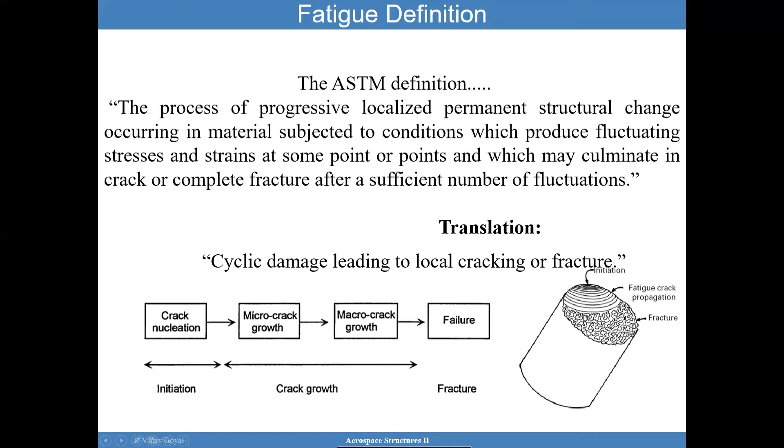So the evolution of fatigue requirements has evolved. Historically, before the 1950s, the design requirements were driven by basic engineering properties. And the material properties were really driven by strength and creep.

From the 60s to 70s, there's more emphasis for designing against fatigue and considering the high cycle fatigue and low cycle fatigue. I'll be covering some of that history, which really predates this time. It goes even back to the late 1800s.

drivers. For example, for fatigue, what I'm looking for is that initiation. Once the crack initiates, perhaps I can then switch into damage tolerance. But when I look at damage tolerance, I am assuming that there's some inherent defect that needs to be considered in the design.

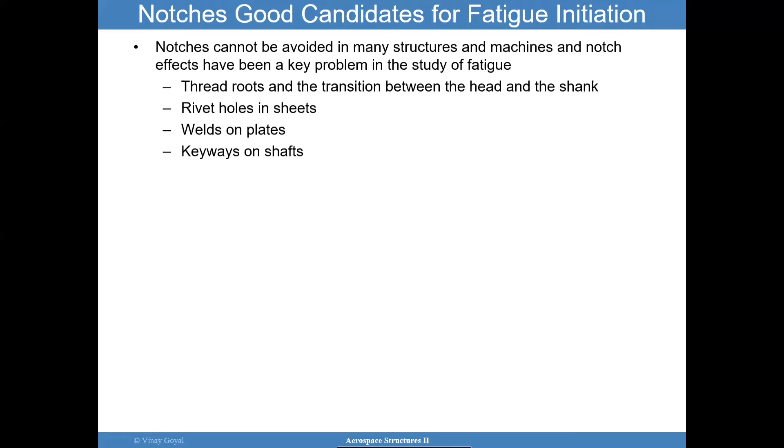The idea is really to decrease the stress concentration as much as you can, especially if the structure is subjected to fatigue environments. Thread roots and transition between the head and the shank can be a problem. Rivet holes in sheets, welds on plates, keyways on shafts. Those are just a few examples.

So what are the factors that influence fatigue damage? You have the stress range, and I discussed that before. If you have a small amount of stress range, such as bending an aluminum clip back and forth slightly, you're unlikely to fatigue that part. But if you bend that aluminum wire very dramatically back and forth, then you're more likely to influence the fatigue damage and expedite the process.

Stress range is really the basic cause of plastic deformation, and consequently, it is the one that can cause the accumulation of damage. Another point I want to make is the mean stress. If you have a mean stress that exists in a part, you're also likely to influence fatigue damage.

Stress gradients - for example, I'll show you later that bending is a more favorable loading mode than axial loading, because when you have bending on a part, fatigue cracks will propagate into a lower region of lower stresses. And it is proven, and I'll show you some data, that bending is actually more benign than if I were to axially load the sample cyclically.

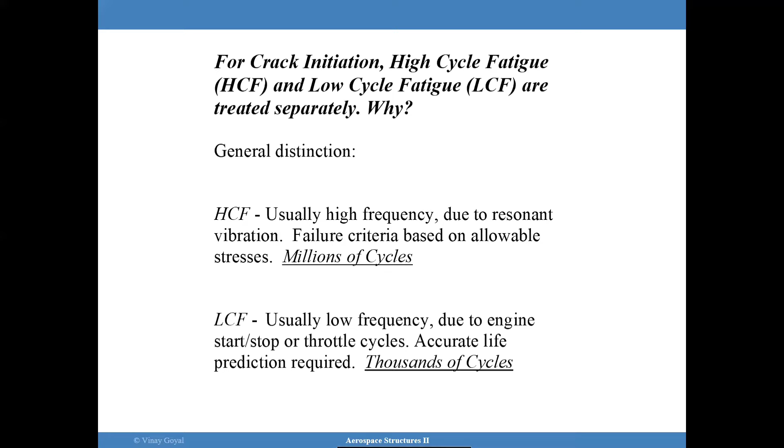This has happened multiple times now. I think it's important to understand that the way this particular airline operates is that they have quick turnarounds, and very short flights, and they predicate themselves on flying each aircraft more than 3 or 4 times a day. Some of them can reach 6, 7 times, and that is not common in the airline industry. Their model is such that you are taking off quite a bit and landing.

And so you may not be able to use hours in service as a good metric for inspections because of that. As a consequence, this particular situation had to be revisited, because clearly fatigue from a hole was a particular concern, and it was driven really by the ground to takeoff and ground to air cycles, back to ground. That's one cycle - that's one complete cycle.

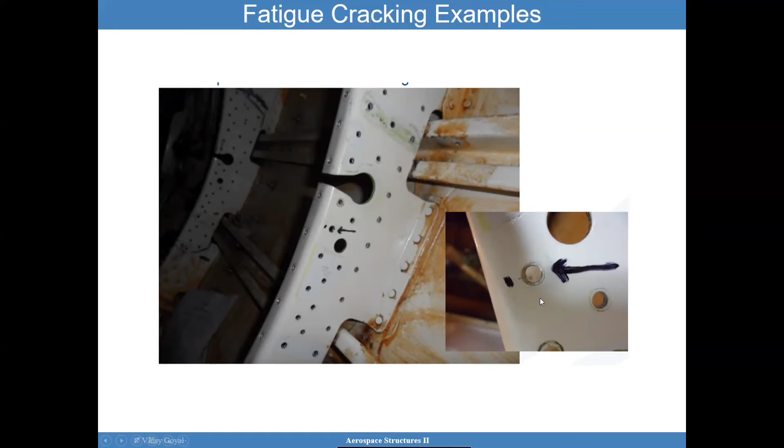Fatigue cracking in other aircraft applications is hard to see here, but there's a crack near a hole. We've also seen fatigue issues with turbo machinery in engines, for example.

You have severe structural issues and challenges that you're going to see, especially with engine applications: high structural loads, fatigue, creep. You definitely need something that's environmentally friendly, fatigue cracking resistant, able to resist initiation and propagation, creep resistant, strong, lightweight, predictable, affordable, and environmentally stable. Nickel superalloys tend to do a good job of those.

Combustion turbine components present a severe thermal fatigue cracking challenge. You have mechanical fatigue caused by cyclic thermal strains, high temperatures accelerating fatigue damage, and then oxidation at the crack tip that can make things worse.

Here's an example from the literature of fatigue, a major challenge in turbo machinery. Here you have a rotor that has exhibited fatigue crack initiation, clearly caused by load cycling. Cyclic loading occurs at cyclic loads well below the ultimate strength. That's the issue - you may think you have sufficient strength margin against the ultimate capability, but it's really the load cycling that's causing this damage.

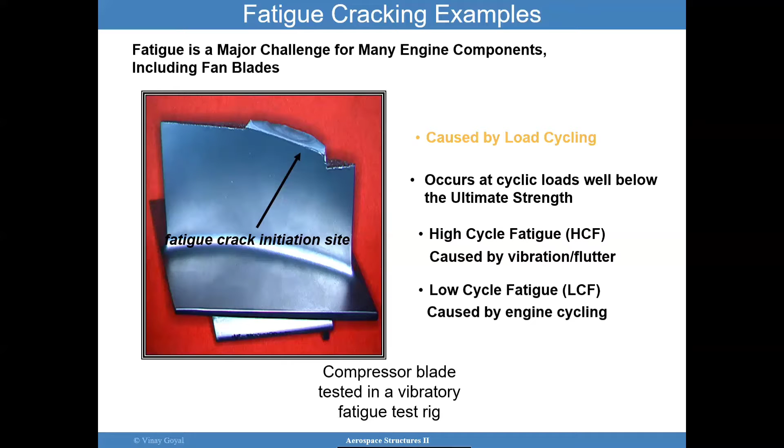We have the famous Aloha Airlines Flight 243. The failure had occurred due to cyclic loading. The mid-flight fuselage failure was caused by corrosion-assisted fatigue in that example. All machine and structural designs are problems in fatigue because we have the forces of nature in play.

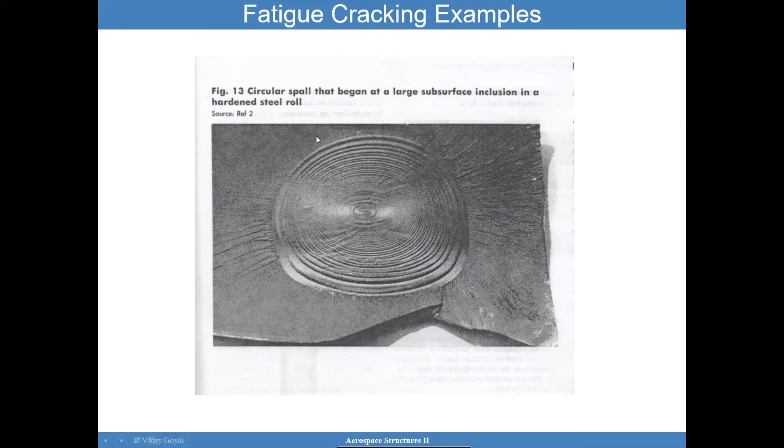Here's an example of a circular spall that began at a large subsurface inclusion in a hardened steel roll. Hopefully you'll soon be an expert at telling me where you think fatigue initiated.

The lesson learned here is that while you may implement fillet radii in your application to reduce the potential for fatigue crack growth or initiation, it's important to understand that you may intend something for the drawing, but manufacturing produces something else. So it's important to inspect and ensure that your part, which may be fatigue critical, be compared against the drawing to ensure you haven't violated any requirements. Otherwise, you may have unintended consequences, and you may have thought your design was adequate, but it was not.

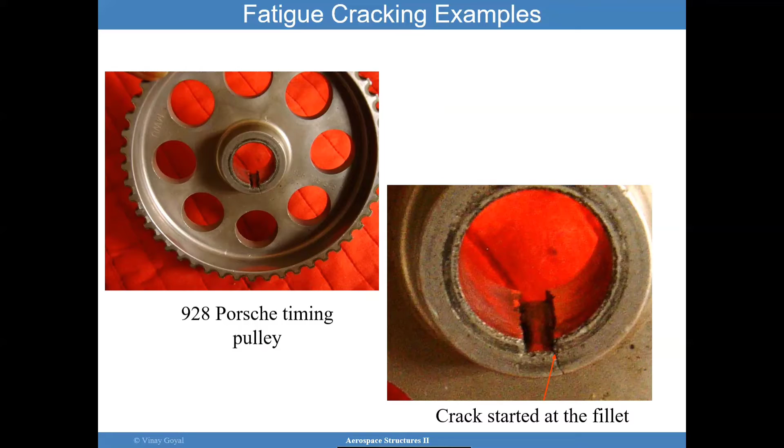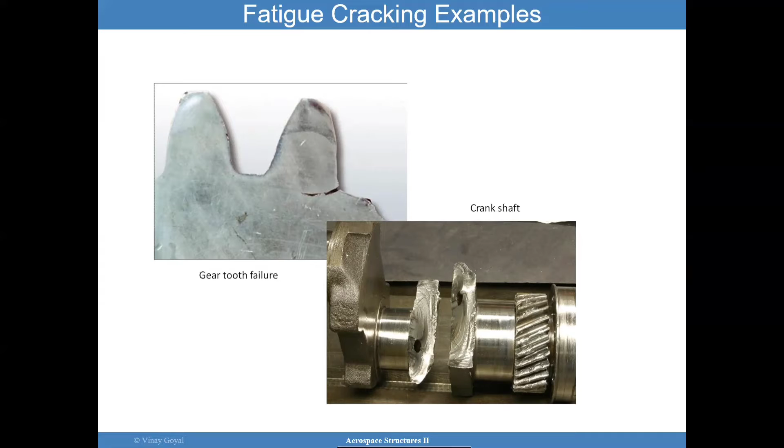However, once initiation occurred, it was quite rapid and it accelerated, and you will see these beach marks that we'll be talking about later on, followed by ductile failure or sudden failure in the remaining net section. Fatigue crack growth examples can occur in tooth failures and crankshafts, and they're all going to have very similar types of beach marks, which I'll be discussing soon.

Here, why don't you take a moment and see where you think the crack initiated. And I know that I talked about beach marks.

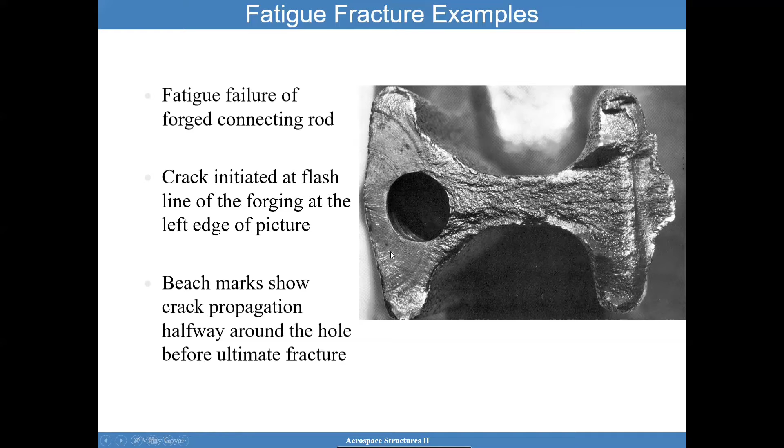You also have fatigue failure of a forged connecting rod. The crack initiated at a flash line of the forging at the left edge of the picture, and you can see some of the marks here. The beach marks show crack propagation halfway around the hole before ultimate fracture, and this is your ultimate fracture right here.

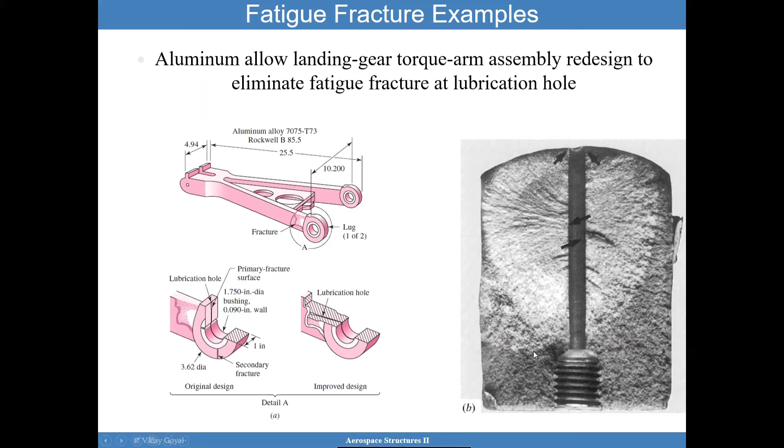Here you have an aluminum alloy landing gear torque arm assembly, which required a redesign to eliminate fatigue fracture at the lubrication hole. Again, fatigue fracture can occur in these types of stress concentrations. In this case, feel free to pause the video and see if you can spot signs of crack initiation, growth, and what could have caused the growth to failure.

Fatigue fracture examples are not new—they're not from the 1900s. On May 8th, 1842, we had the Versailles train crash. The axle of a locomotive train suddenly failed while departing a birthday celebration for a king, causing a derailment which resulted in a crash and fire, and more than 75 people died. During subsequent debates regarding this accident, the term fatigue was coined to describe the sudden fracture of a component from repeated stresses which appeared to be performing well up to that point.

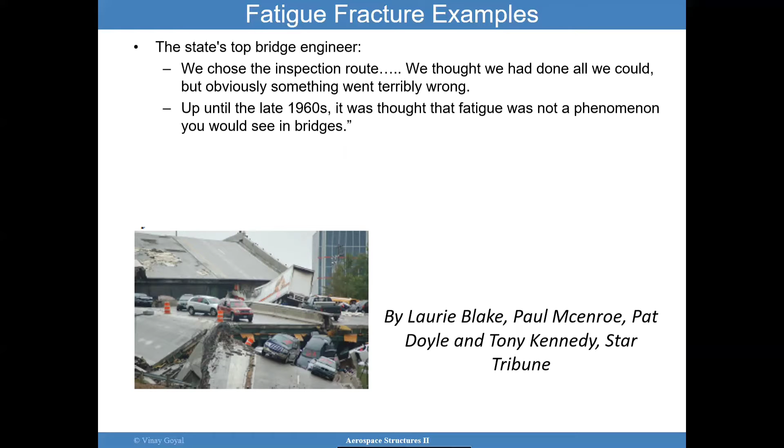So enough about examples—let's look at some stages of fatigue failure. Stage one is the initiation of a microcrack due to cyclic plastic deformation. It doesn't always have to be cyclic plastic deformation.

Here is an example of the features of a fatigue fracture surface. Here you have the origin, and then you're going to have different areas of texture as you move along—you can see these marks. Then suddenly you're going to have some sort of shear lip that could occur, and that's indicative that now you have turned into a sudden failure of some sort.

So region A, which is right here, all in white, we're going to call that the fatigue crack growth area. Over here, the shaded area is the final static failure, or the ductile failure, or the brittle failure that occurred suddenly.

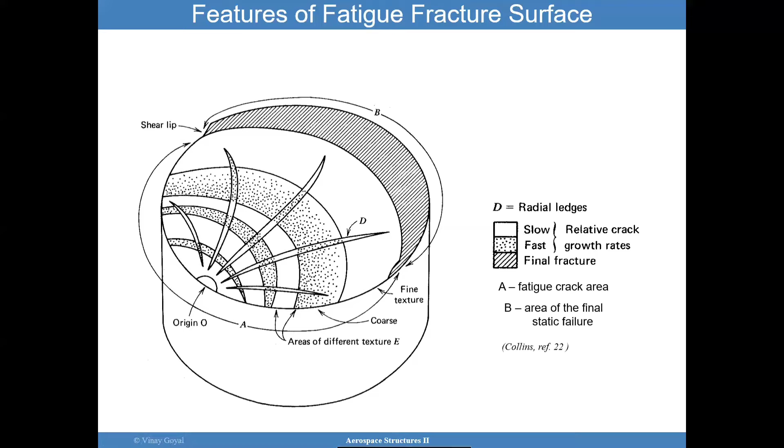So what are the fatigue stages for crack growth? If this is the loading direction, we will have stage 1 crack propagation, and the fatigue crack initiation will occur via persistent slip bands. The small crack propagation will be via a mode 2 mechanism, meaning that the surfaces are sliding relative to each other, regardless of the fact that we're loading in the mode 1 direction.

So even if the loading is perpendicular to the sample, the crack will start as mode 2 and then start moving into a longer crack propagation via mode 1 mechanism. Mode 1 here means it opens the crack. Mode 2 means it's sliding, the surfaces are sliding past each other.

Here you have a little more detail about the initiation process. That's your original surface. You have some amount of intrusion, some amount of extrusion, and then you have the persistent slip bands. We have this stage 1 fatigue crack growth, and you have all these gliding dislocations. But as this occurs and propagates further, then it will become mode 1. So it starts sliding and then turns into mode 1.

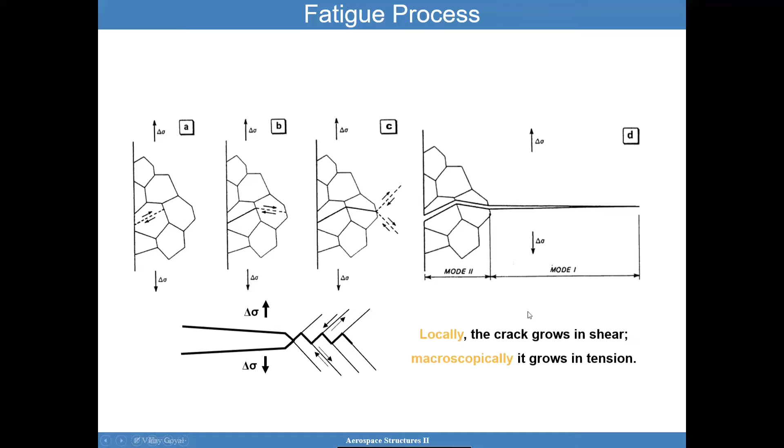So the fatigue process from the material science perspective is cyclic slip, fatigue crack initiation, stage 1 fatigue crack growth, stage 2 fatigue crack growth, brittle fracture, or ductile rupture. So it's really important to understand that these processes occur microscopically and then turn into macroscopic crack growth, and all of that has to do with the persistent slip bands we talked about. You're going to have some surface roughening because of that. Sometimes you get some sort of peeling indication of the surface.

So the fracture surface characteristics are important to understand, especially in the failure investigation.

You have the ductile mode of fracture. The typical surface characteristics will include cup cone, dimples, a dull surface, inclusion at the bottom of the dimple. You could have a mode of fracture that's brittle intergranular, which is between the grains, so that's shiny - the grain boundary is cracking. You may have a brittle transgranular fracture, which is also shiny. You're going to have some cleavage fractures, and it's relatively flat.

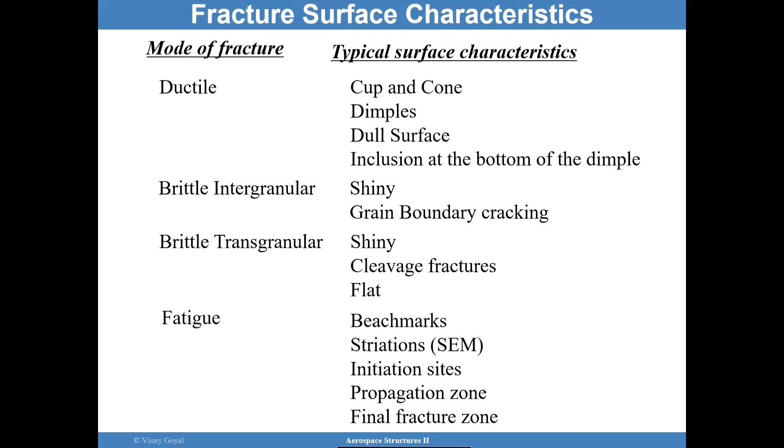And then fatigue is going to typically have beach marks, striations, initiation sites. You're going to have a propagation zone and a final fracture zone. So let's focus on this a little bit. I think it's worth looking at, especially if you're working on a failure investigation. This can be very valuable to you.

Say you have different fatigue surfaces, and I ask you, hey, where does the crack initiate? Where does it propagate? And what does the final rupture look like? So let's focus first on the high nominal stress conditions, which you could have a no stress concentration type, you could have a mild stress concentration, and a severe stress concentration.

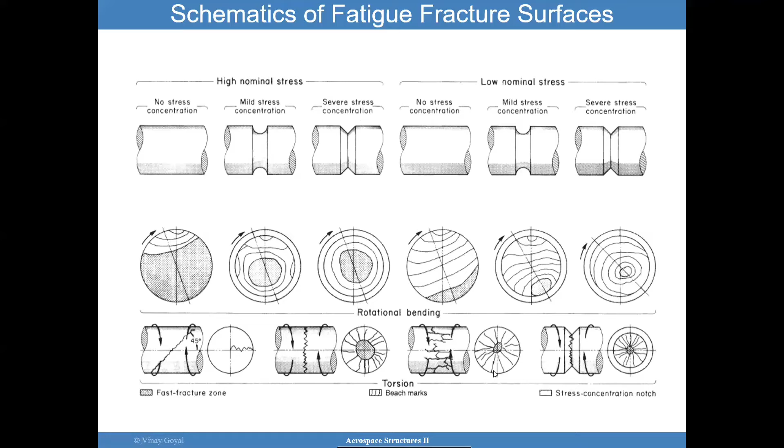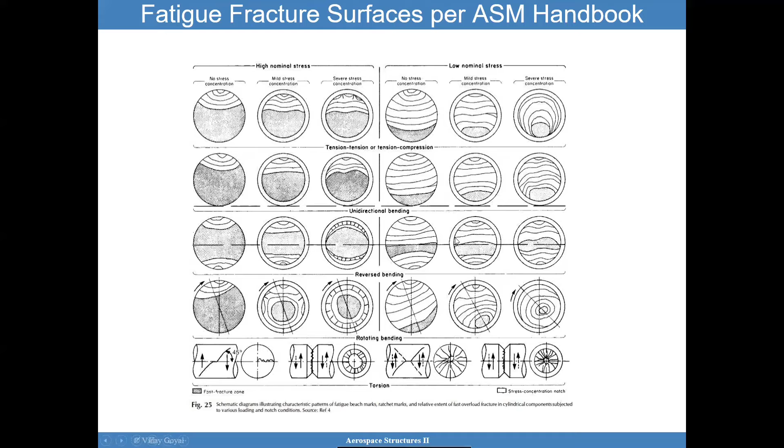Here's other pictures that are pulled from SAE. I invite you to pause the video and see if you can determine what is going on with these pictures. And for the ASM handbook, again, more pictures for you to consider and study on your own. I covered all this, and here the ASM handbook provides additional pictures for you to study, Figure 23.

Fatigue life methods: the methods are required for predicting the number of cycles to failure for a specific level of loading. There's two methods: stress life method, least accurate, particularly for low cycle fatigue application, is the most traditionally used. Strain life method requires a detailed analysis of plastic deformation on localized regions. You're going to have several idealizations leading to some uncertainties, and low cycle fatigue can be very difficult to predict.

I'm going to show you why it's uncertain and why this is such a difficult problem to really predict accurately. You will be confronted with the situation of having to do it, and my goal is to teach you some of the things you need to consider as you try to use tools for analysis predictions. For like any analysis, whether it's strength, fracture, heat transfer, you need to have some constitutive behavior that allows you to predict what you're looking for.

When you look at fatigue, you really are relying on a lot of test data that allows you to find curves, or define curves, that you can then use to predict fracture or fatigue. The fatigue methodology typically starts with understanding the loading history provided, the component geometry, material properties. Once you've defined the stress strain curves for the materials, then you can go into damage analysis using the service life of the component, the component geometry, the material properties. With that information and the fatigue data together, you can determine fatigue life.

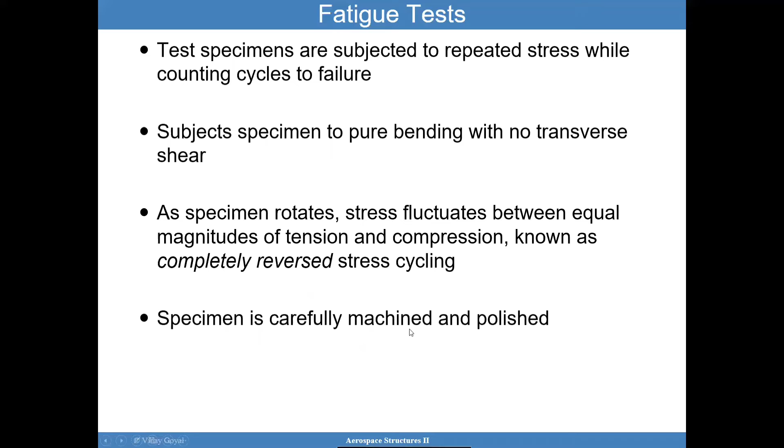So what are the effects of diameter on the specimen? If I have a large cross-section compared to a smaller one, and it was a hollow tube, then you have a lot of area under a lot of stress compared to this situation. It was found that even though I may have this same amount of stress, for a larger sample it can reduce the endurance limit, because there's more likelihood of microstructural defects being present when you have a larger area.

So there were some size effects found. If I had a 0.3-inch diameter sample, it took longer to fail, even though it had a thinner section, but the same stress. When I went to a larger diameter, the endurance limit dropped. What I mean by endurance limit is when I got that infinite life situation.

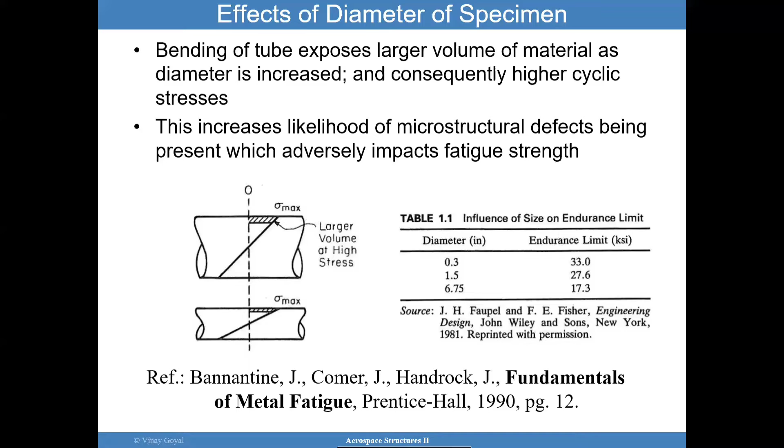So what are the types of repetitive loading you may see? In general, you may see moderate, mild, or severe periods. In a ship, you'll see weather conditions like a storm. In a commercial aircraft, you're looking at turbulence. But you're going to have a fatigue spectra as a point. In a launch vehicle, you'll see a different fatigue spectra. The idea is, how do I count the cycles? How do I count these amplitudes that could be causing a problem for me?

I want to define some terminology that's going to be useful. You're going to have the amplitude of that stress, which we call sigma max minus sigma min divided by 2. We call the range sigma max minus sigma min. And then the mean stress is sigma max plus sigma min divided by 2. One cycle is considered when I return back to that mean value.

Then I have R, the R ratio, which is the minimum peak divided by the maximum peak. That's another important thing to consider. When do I get one reversal? When I go from positive to negative, or from one end to another, we call that a reversal. But for me to have a full cycle, I need to go from one value and back, which represents a full cycle. This will be a half cycle.

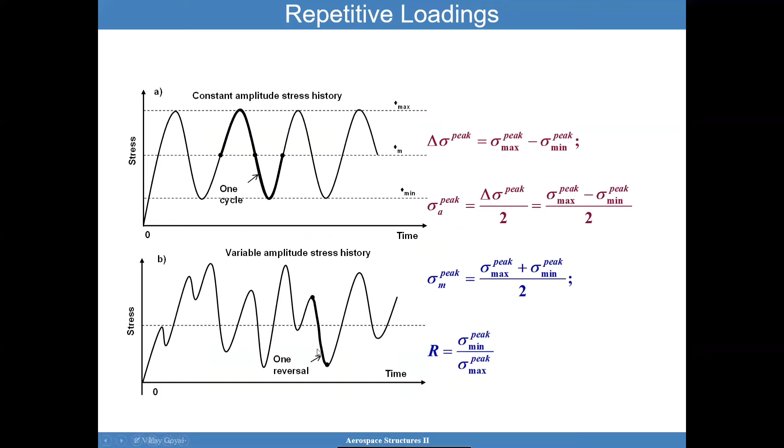This one has a reversal, but in this case it's not fully reversed, as I had discussed in this slide. So some terminology to consider.

Again, the fluctuating stress can be characterized by simply specifying the maximum and minimum stress, and then the mid-range or mean stress is important, and the alternating stress component sigma A is measured from the mean to the max. Very important to understand this terminology as we'll be using it.

The stress ratio tends to be very important because that tells me if I have a reversible type situation. If R equals -1, then sigma min is the negative of sigma max, which means I have an R of -1, and so I have a fully reversible cycle.

Let's look at this again here. Sigma max is 300, sigma min is -300. 300 divided by -300 is -1. And as you can see, R of -1 becomes a stress ratio that gives me a fully reversed situation.

There's another terminology that people use, called the amplitude ratio, which is the amplitude divided by the mean. That's useful to know because it gives you a relative understanding of how much I'm really fatiguing in terms of stress relative to the mean stress.

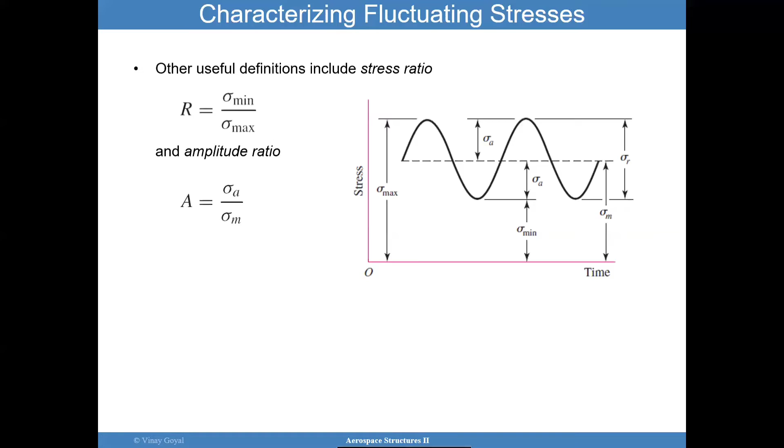If the mean stress is very high, that gives you some information about how much I'm ranging from max to min, how big that range is. This is very important to really understand what's going on. I know I have a lot of information here. I want to cover a little bit about what R ratios mean in terms of the loading situation.

When R is -1, you have equal value of max and min stress in terms of magnitude, and my mean stress is right at 0. So that's fully reversible loading.

Then I have this situation of R equals 0, which means that if I put R equals 0, that means sigma min is 0. So that means I have a maximum stress, but the minimum stress is 0, and so the mean stress is greater than 0 in this case.

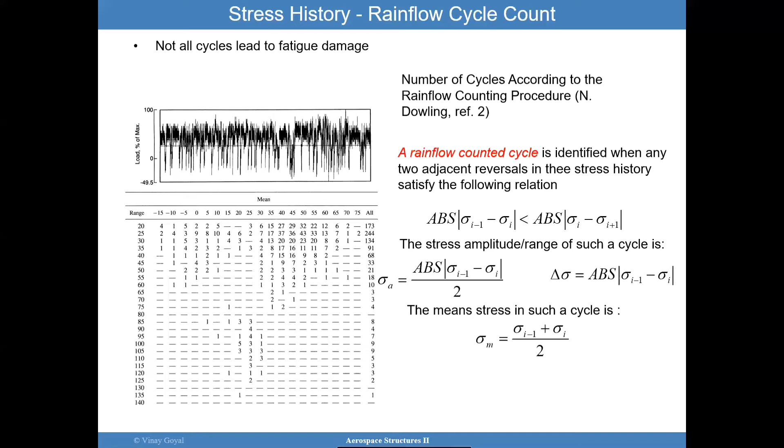So again, you have to look at two adjacent reversals in the stress history and then determine whether you should count the cycle. I encourage you to look at the link below to study how to do a Rainflow cycle count. I won't do it in this particular lecture, but I'll cover a little bit on how this works so that it's understood.

But I don't want to start counting from the small ones—I want to start counting from the big ones to the small ones, and that's really the way you want to go about it. The Rainflow counted cycle is identified when any two adjacent reversals in the stress history satisfy this relationship. That's really when you count the cycle for that.

So again, I'll put a link below where you can study other examples. It's going to be a nice video on that. And it's not by me.

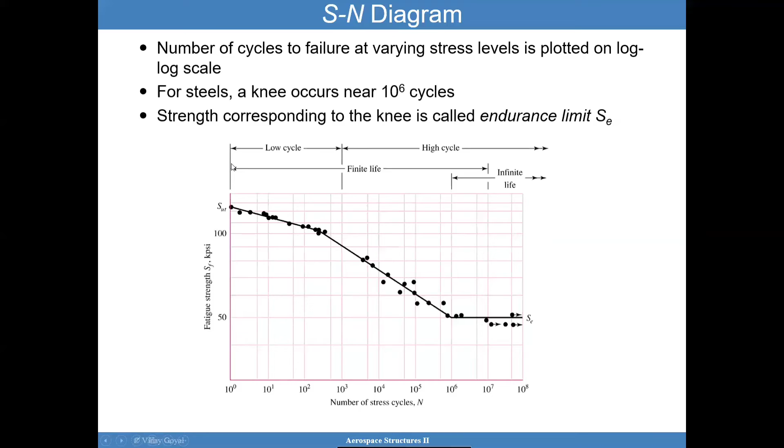The endurance limit is usually presented in a log-log plot, with the actual SN line usually representing the mean of the data. Certain materials, primarily BCC steels, have an endurance or fatigue limit, SE, which is a stress below which we believe the material will have infinite life. For engineering purposes, we could consider infinite life to be 1 million cycles, but I'll warn you against that, because some applications such as turbo machinery could reach 1 million cycles fairly easily.

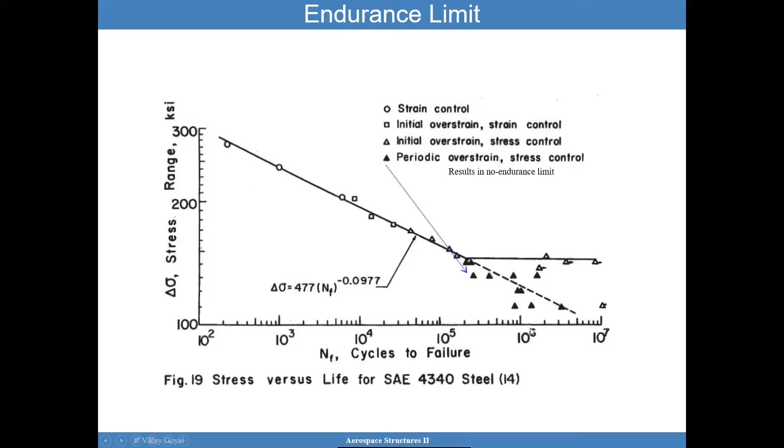If you look at a situation where there's periodic overstrain, look at how the endurance limit is gone, where I start having this finite life. If I have an initial overstrain and do strain control, for the most part you have an endurance limit, but at 10 to the 7th cycles, you start losing it. So if you have periodic strain issues, there could be a situation where this endurance limit no longer applies.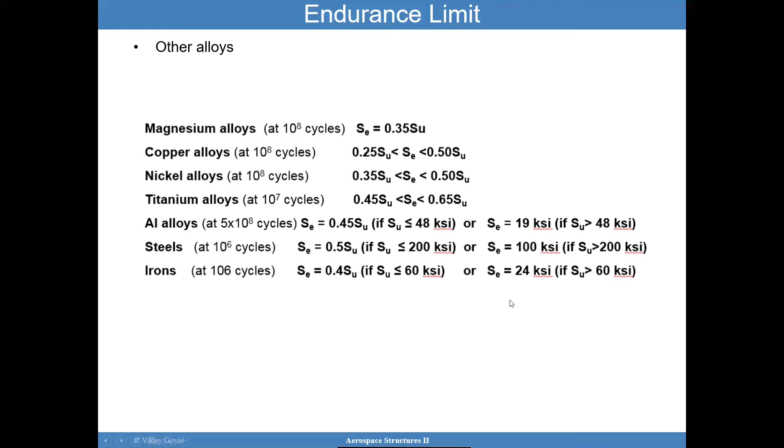For aluminum and copper alloys, there's typically no endurance limit, and a lot of people think there is, but there's not. Eventually these materials will fail due to repeated loading. To come up with an equivalent endurance limit, designers typically use the value of fatigue strength at 10 to the 8 cycles to go for a robust design.

So we already covered this.

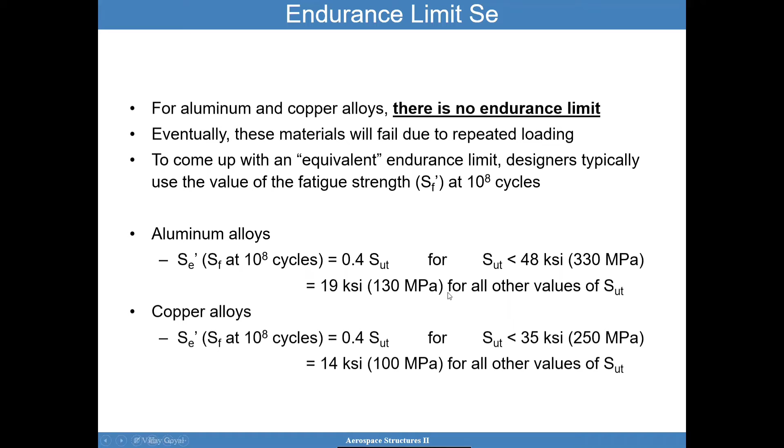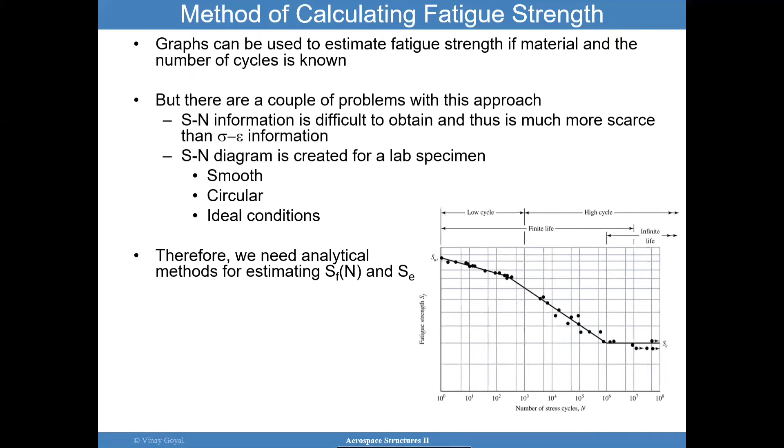Graphs can typically be used to estimate fatigue strength if the material and the number of cycles is known. There are a couple of problems here: the SN curve is sometimes difficult to obtain and sometimes more scarce than the stress strain information. The SN diagram created is usually done in a lab environment for smooth, circular specimens and contains ideal conditions. Therefore, analytical methods have been used to estimate the fatigue strength and the endurance limit.

Let me discuss infinite life versus finite life. Infinite life implies that it will never break at that endurance limit, and that's the lowest value of strength where that happens. Finite life implies that we know the value of n, that we can find what that is, knowing what the stress range is. Typically, the value will be higher than the endurance limit.

Going back to the prime versus non-prime, it's important to understand that the strength variable with this apostrophe implies that the value of strength applies to a lab specimen in controlled environments. A variable without a prime implies that the value of strength applies to an actual case. So SE usually needs to be modified for differences between the lab specimen and the actual condition, and SE depends on whether you consider infinite life or finite life. Very important consideration.

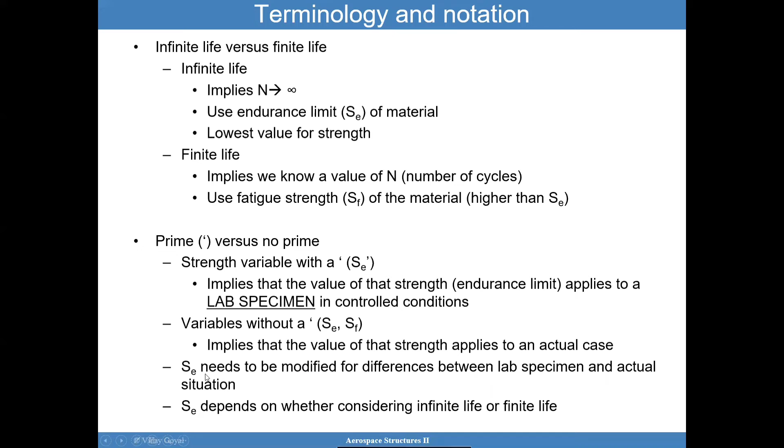So if I know SE from a carefully prepared test specimen, and I want to find SE for the actual part, I need to make sure I account for the Marin factors, because testing of the actual part is not practical. So the Marin factors allow me to adjust for this value. A lot of people don't even do this, but it's important.

Ka is called the surface condition modification factor, depending on that surface condition. Kb is a size modification factor, as we discussed before - different sizes, larger sizes can affect your endurance limit. Kc is a load modification factor, so your test may have been done one way, but when you translate it to this value for your application, you may have to modify that. Kd is the temperature modification factor. Ke is a reliability factor if you want to account for reliability estimates, because I told you the prime value is typically the mean value.

And then KF can be miscellaneous values. But note, the Se prime is usually a rotary beam test specimen. And SE here becomes the endurance limit at the critical location of the part in the geometry and the condition of use. So again, very two different values. Don't get confused this one with that one. And don't go running with the value from the test specimen. Try to make sure you consider the Marin factors.

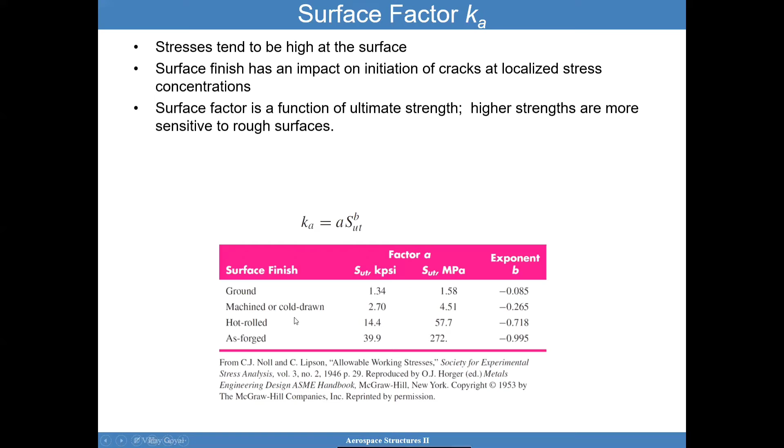As an example from Shigley's book, directly from that, if I have a minimum ultimate strength of 520 megapascals and a machine surface, what Ka should I use? Well, from this table 6.2, I have this condition, I have these values, so I plug it in and get a 0.86 factor.

And notice that people have found a discrepancy below 2 inches and above 2 inches. For parts that are not round and rotating, an equivalent round rotating diameter has to be obtained. One way to do that is to equate the volume of the material stress above 95% of the maximum stress to the same volume in the rotating beam specimen. So the lengths will cancel, but you want to equate the areas.

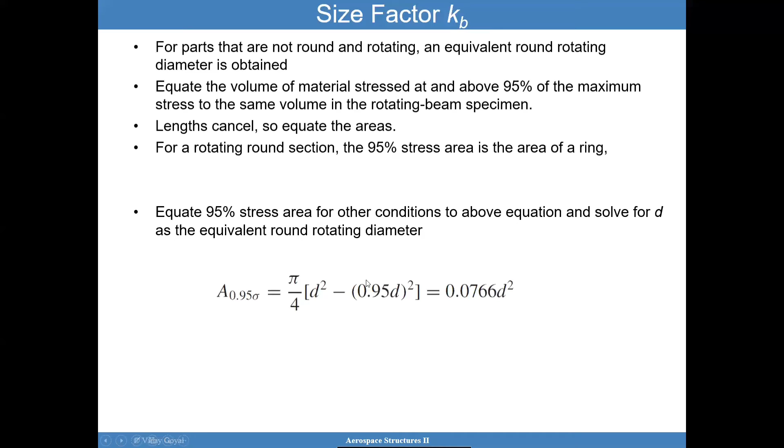So for a rotating round section, the 95% area is the area of the ring. And so you have to calculate the area of the ring and then come up with an equivalent value of D for a rotating diameter. And that's given here as an example. That's for the ring and that's for a rotating diameter. And then you solve for D.

So the question here is, a steel shaft is, and this is from Shigley again, a steel shaft is loaded in bending at 32 millimeters in diameter, abutting a filleted shoulder 38 millimeters in diameter. The shaft diameter has a mean ultimate tensile strength of 690 megapascal, and they want us to estimate the Marin size factor in a rotating mode and non-rotating mode.

So I can quickly use the equation since it's a shaft. I can quickly use the calculation, and it's given in millimeters, so use the equation I provided, and straight in you get a KB of 0.858. For non-rotating mode, I'll then use 0.37 times D. I get 11.84 and I plug it in and I get a KB of 0.954.

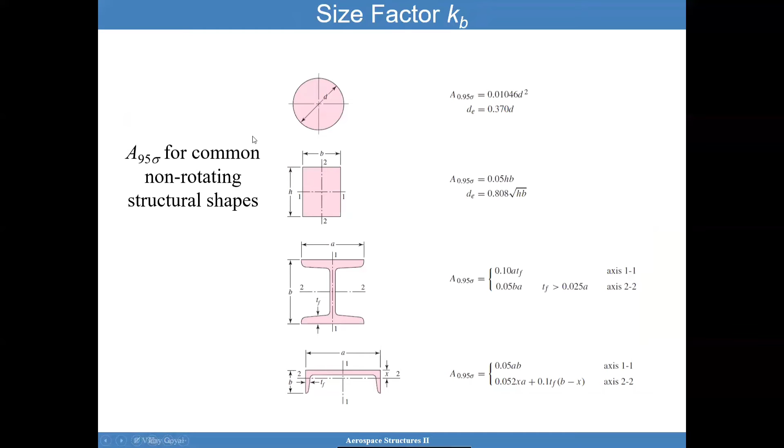The loading factor: if you have bending, the value is 1, for axial it's 0.85, and for torsion it's 0.59. So you have to correct it depending upon the situation that you have.

The KD factor is a temperature factor, and this is specific to steel, but it may change for another material. As you go higher in temperature, you're going to affect the KD value significantly, so it's important to consider that when correcting your endurance limits. Here is a formula for it. You can use either this or the interpolation curves, or if you were to plot this, you can get a curve fit and use that.

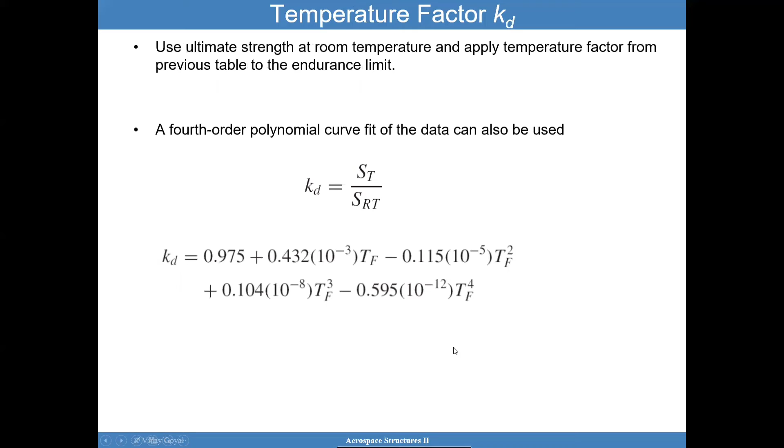Here's yet another example. If you have a steel at 70 KSI that's going to see 450 degrees F, quickly plug it in and get a KD that basically has almost no effect. So for your actual application at 450 degrees F, the endurance limit is mildly affected.

That's just using interpolation, but you will get the same value as this approach should give. Now, if this is the room temperature endurance limit by test, and if you only consider tensile strength at room temperature, then you have to multiply it by the value you find here. So that's interpolated - 1.007, which is the same thing I got with the formula.

And the tensile strength at 450 can be estimated because it's given to you from data handbooks, and that's 70.5 KSI. So then you want to calculate for this particular steel - since you have the ultimate strength and you don't have the value of SE from the coupon, you multiply by 0.5 to get 35.2.

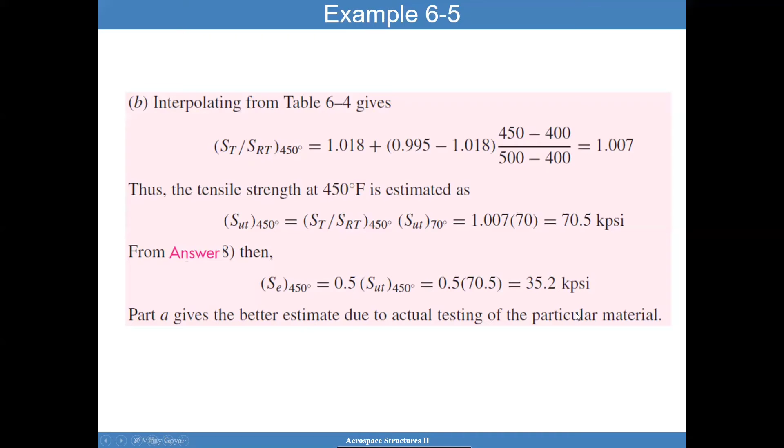So SE prime equals 0.5 times SUT typically, but that represents 50% reliability. It does not imply overall reliability - that's an important aspect here. So at 50%, K is 1, and at 90%, K is 0.897, and so forth. So K needs to be calculated using this reliability table.

There are other miscellaneous effects like residual stresses, cold working, hardening, corrosion, cyclic frequency, and so forth.

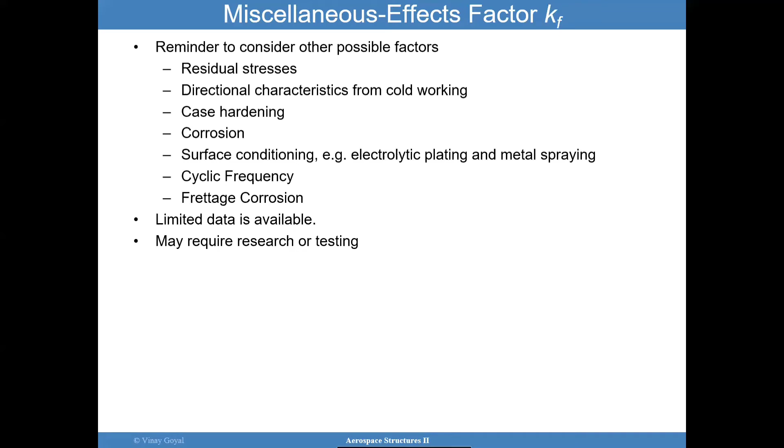Possibly the majority of your tests may be done at fully reversible. And so now, as you can see, the R ratio, which is sigma min divided by sigma max, becomes important. And again, SM equals 0 is R equals -1. So then it becomes important to understand the effects on the various testing that exist.

We could study - so let's look at the alternating stress in the right figure. For constant alternating stress, you're going to see that for a mean stress that's in tension, the number of cycles to failure is less. When I go to fully reversible, a little bit more cycles, and when I go with a mean stress that's in compression, then I get even a higher number of cycles. So the effects of mean stress are quite significant and need to be considered in many situations.

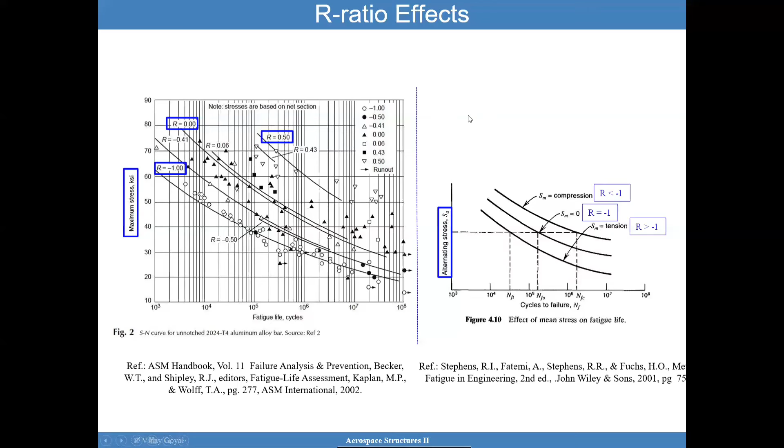I want to point out that when you go to ultra cycle fatigue, giga number of cycles, it's potential that even though you thought you have infinite life, you could start having some amount of fatigue failures. People have seen that crack initiation and propagation can occur after a large number of cycles, so you cannot completely discount the fact that that could happen in gigacycles.

Again, this is the SN curve to remind you what that looks like. You can do these calculations graphically, as one approach. You can write the equation for the SN line that goes from 10 to the 3 to 10 to the 6th, and then from there it's constant after 10 to the 6th.

That's one approach. The equations of this line are basically: fatigue strength equals A times number of cycles to this exponent. A can be approximated as F times SUT squared divided by SE, and this same ratio here without the squared goes into B here. So with very limited information, you can construct the SN diagram for a particular material, as long as you can figure out what SE is, and that F is typically taken as 0.9, but not always -- it depends on what the value is at 1,000 cycles.

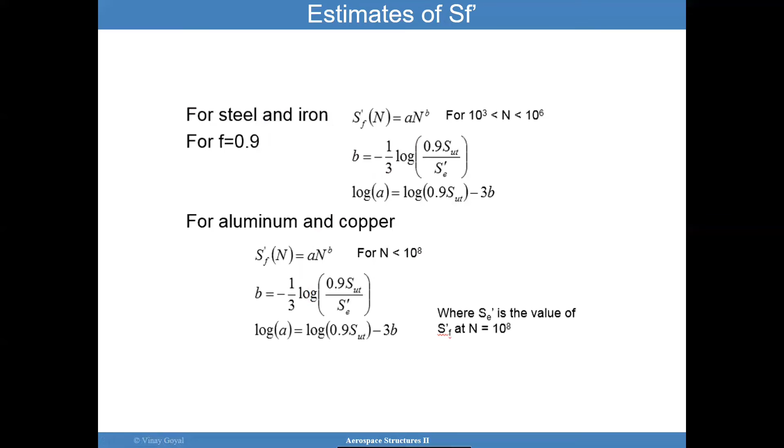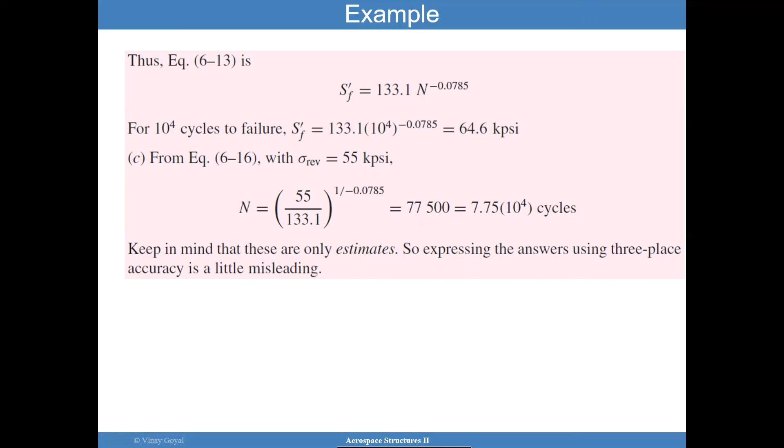Using this equation here, that's endurance strength due to 10 to the 4 cycles. For fully reversible, 55 KSI, plug it into this equation for which I found A and B exponent, and I get 7.75 times 10 to the 4 cycles. So these are only estimates, and recall that this is not going to be 100% accurate because of the difficulties with predicting cycle life and the scatter you may get in the test data.

So if you have another situation: I have a hot rolled bar that has been machined to a diameter of 1 inch. It is to be placed in reverse axial loading for 70,000 cycles to failure in an operating environment of 550 degrees F. Using ASTM minimum properties and a reliability of 99%, estimate the endurance limit and fatigue strength at 70,000 cycles.

The ultimate strength of this material is 50 KSI at 70 F for a hot rolled steel bar, which has been machined.

Since we're looking at a rotating beam specimen, the endurance limit is not known at room temperature, so we'll have to estimate it. We'll first determine the ultimate strength at the elevated temperature, and you can basically interpolate it to figure it out. You get that this ratio is 0.979.

Knowing that information and knowing that it's 50 at 70 F, you can then determine that the ultimate strength at 550 degrees is 49 KSI. So it's not a big impact due to this temperature.

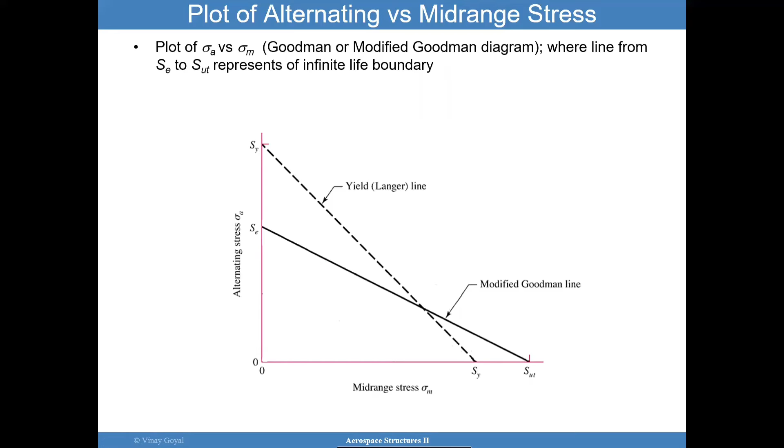So here is another view of that. You can plot the mid-range ratio, mean stress divided by ultimate strength, and mean stress divided by ultimate compression strength. Then you have the amplitude ratio of SA divided by the endurance limit, the theoretical value, or from the specimen design, that's why there's a prime.

You can see that there's very little effect in the mid-range value when you go negative. All the data has been normalized in this manner to show you the trends, but again, very limited impact in the performance when you go into compression.

So there are a lot of different failure criteria to demonstrate infinite life. One, for example, this yield line is called - you have the Goodman line, you have the Soderberg line, which connects SE and SY instead of SE and SUT, that's a little more conservative. You also have the Gerber line, which does a fairly good job of that.

So again, these lines are intended to give you a prediction of when you get infinite life, and as you can see, if you stay here in this zone, you're fairly safe. But it is fairly tough to come up with the right one for every situation.

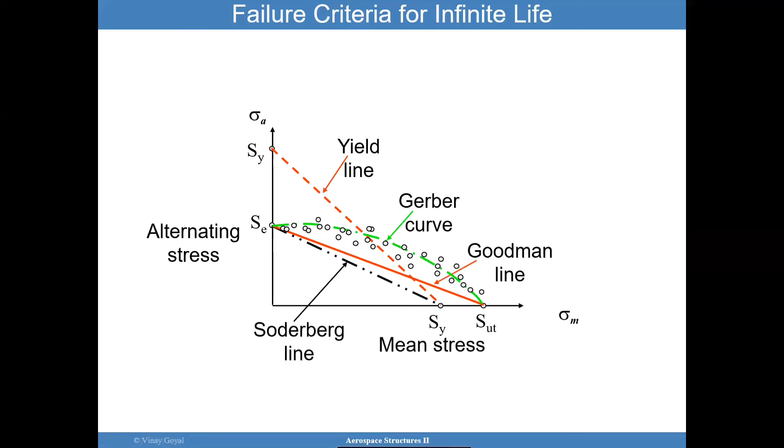Again, the safe zone is not showing up here, but this is your safe zone typically. Draw the yield curve, yield to yield. These are alternate stress, these are mean stress. Then draw the line from here to here, and that gives you the endurance to the ultimate. Then this becomes your safe zone where you have potential infinite life. But again, this value becomes extremely important to get, and it's important that we consider the Marin factors. Otherwise, you're going to be way off.

Other commonly used failure criteria are given here. I plotted the same elliptical line and many other lines, so just keep in mind, for design, you can just stay in this zone here, shown here.

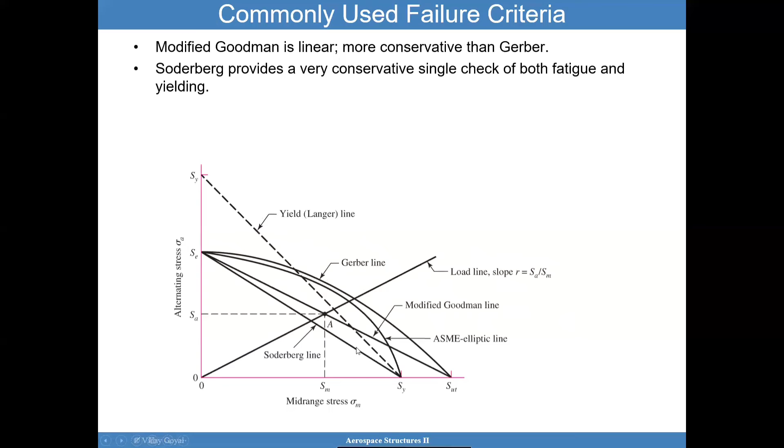The modified Goodman is linear and is more conservative than Gerber, as an observation. Soderberg provides a very conservative single check of both fatigue and yielding, so not a bad line to use, it's fairly conservative. The Langer line represents a standard yield check, so that's one, but then you're operating above the endurance here.

And here are some common equations, but now showing the factor of safety. So if you want to apply a factor of safety on infinite life, typically 1.25, you put it here and then draw the lines accordingly.

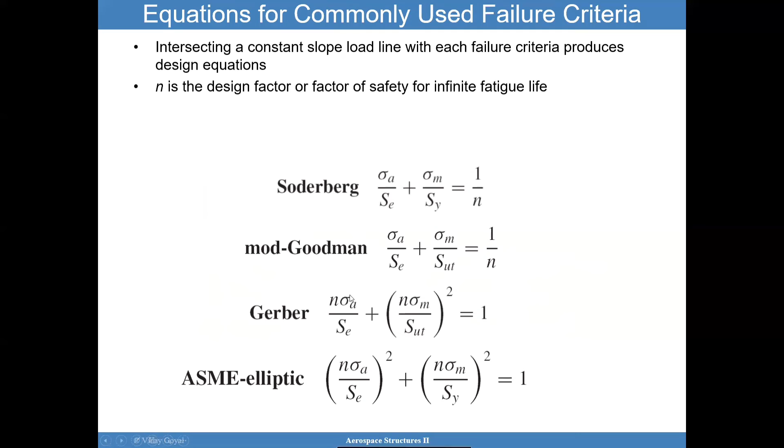This is a summary of some of the equations you may see and how to find a factor of safety, and this is how the different coordinates intersect. I think it's fairly simple to draw it graphically. Here, the same way it is for the Gerber equation in this column. Here is where the coordinates are intersecting, and then the factor of safety, the calculation for that. And the ASME elliptic, for this course, we'll probably focus on the Goodman part.

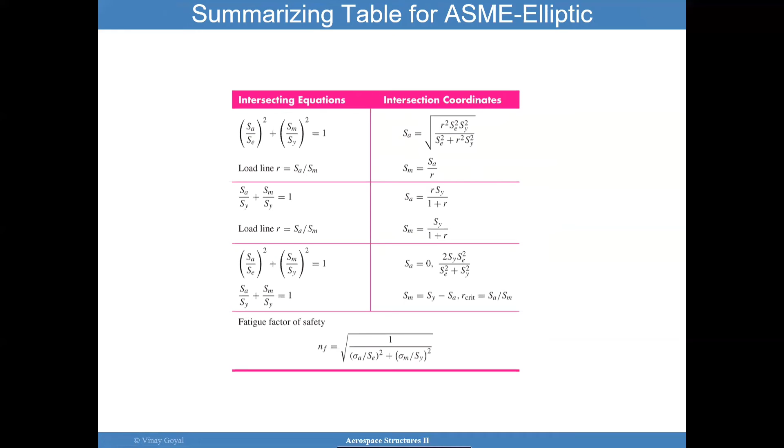Let's look at this example. It's an interesting example from the Fundamentals of Metal Fatigue book, straight from there. Say you have a component that undergoes a cyclic stress with a maximum value of 110 ksi and a minimum value of 10 ksi. The component is made of steel with an ultimate strength of 150 ksi, an endurance limit of about 60 ksi, and a fully reversed stress at 1,000 cycles of 110 ksi.

So they're asking us, using the Goodman relationship, determine the life of the component. Fairly difficult problem because we're combining multiple concepts here now, so we want to tackle the problem little by little. Here's the stress amplitude, we discussed this before. Sigma max is 110, sigma min is 10, divided by 2 gives me 50. The sigma mean is 110 plus 10 divided by 2 is 60.

So now we want to generate the diagrams as we discussed before. We can then look at this equation here, sigma A. We'll just use a Goodman line to figure it out, basically what we're going to do. So let me go straight to where we want to go. So the first step is the alternating stress in our condition, if I go back, is 50 ksi.

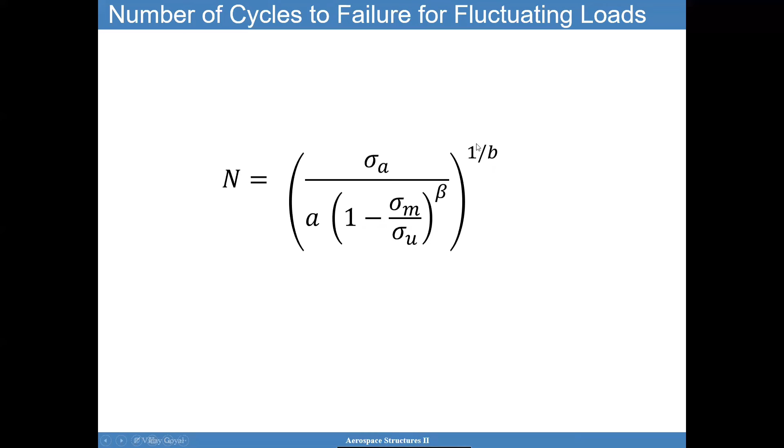Again, in summary: calculate alternating stress, the mean stress, plot that into the Goodman diagram. This point falls outside. Then figure out, draw a point from here to here, but extrapolate all the way to alternating stress to figure out what that value is. Plug it back into the alternating stress plot, and then calculate the life. Now this formula works very similar to this formula - they do very similar things. Sigma A is given, sigma M is given, sigma ultimate is given, so you can determine the number of cycles to failure using that formula as well.

So let's look at example number 2. A steel bar undergoes cyclic loading such that sigma max is 60 KSI, sigma minimum is minus 20 KSI. For this material, the ultimate tensile strength is 80 KSI, the yield is 65 KSI. The fully corrected endurance limit, already corrected for the Marin factors, is 40 KSI with an f of 0.9. We want to estimate the number of cycles to failure using the modified Goodman criterion. I won't do the Gerber criterion - I'll flash it for you, and you can pause it and study that on your own.

The alternating stress becomes 60 minus 20 divided by 2, that's 40 KSI. The mean stress becomes 20 KSI - notice how that's a positive value. This could be a quiz question: if this is a smaller mean stress but with the same amplitude, which one takes more cycles to fail? I'll let you think about that.

So we want to use this criterion. For the modified Goodman criteria, the fatigue factor of safety based on infinite life uses this formula here. So we put it in: 1 divided by sigma alternating is 40, the endurance is given as 40, the mean stress is found as 20, and the ultimate tensile strength is 80. Plug it all in and you get 0.8. That's a factor of safety less than 1, so clearly we are predicting a finite life now.

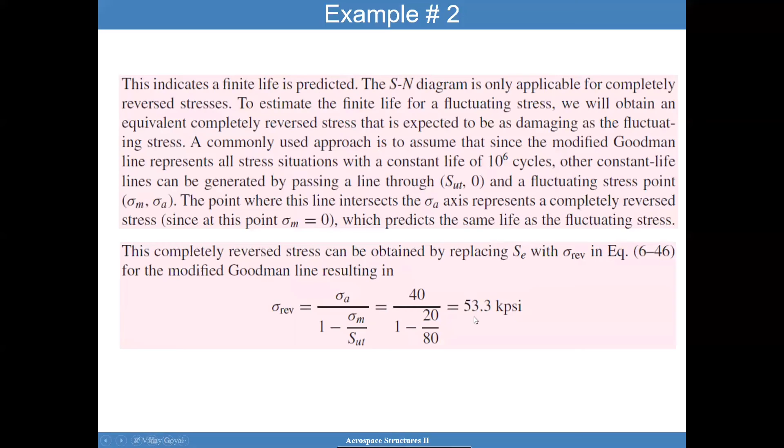So what do you do with cumulative fatigue damage? A common situation is that you have a stress level with n number of cycles. Say you did the rainflow cycle counting we talked about before, which you're going to watch a video at the bottom of this link. Then you have a stress with n number of cycles and so forth - say you have 50 KSI stress range, but that's about 20,000 cycles.

And then you keep going on and you have different distributions of stress and number of cycles, as shown here. Miner's rule is one approach people have used. It's a linear damage model developed in the 1920s to 1945. It has shortcomings, but it's commonly used to come up with an equivalent behavior for what the damage is. It was used in bearings, and later modified for aircraft applications.

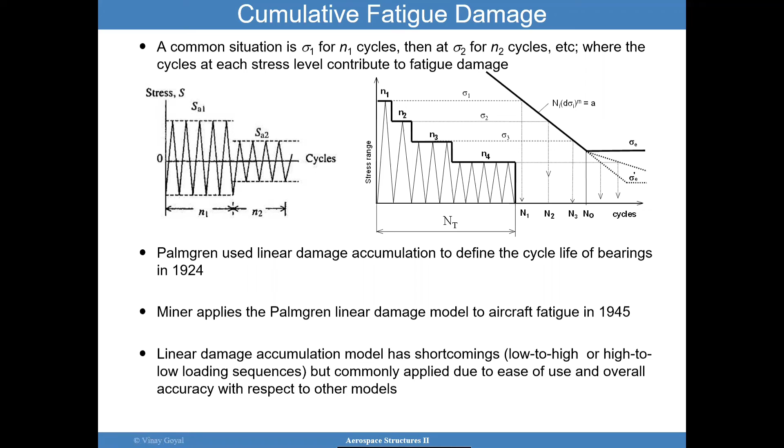So what is the idea we're trying to do? The idea here is that you want to figure out the number of cycles to failure at that stress range - that's the first step. But you know the number of cycles applied to that stress range, and so you can take all these ratios and sum them up. The idea is that you want this total damage to be less than 1 if you can.

That's the general approach. Experimentally, when testing was done, this value D actually came out between 0.7 and 2.2, but on average it was about 1. So there are some difficulties here that decrease your confidence because you wonder what value it's going to hit. So one approach people do is apply a factor of safety on this damage, and that factor typically tends to be 4.

To illustrate Miner's rule, what you're trying to do is determine, after you apply the stress at that number of cycles, what is the new fatigue curve. That's really what you're doing with these calculations. I'm illustrating what this formula does, but it's not necessary for me to cover this because you can just use this formula to figure it out.

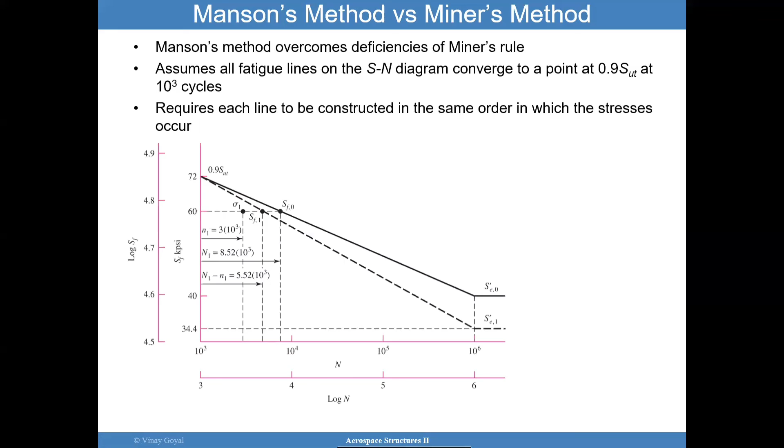This comes straight from this book, Fatigue Life Scatter Factors in Aircraft Applications. There's a NASA NESC video from the Academy that I think you should look at. I've had you look at some of those. It will go into some of this.

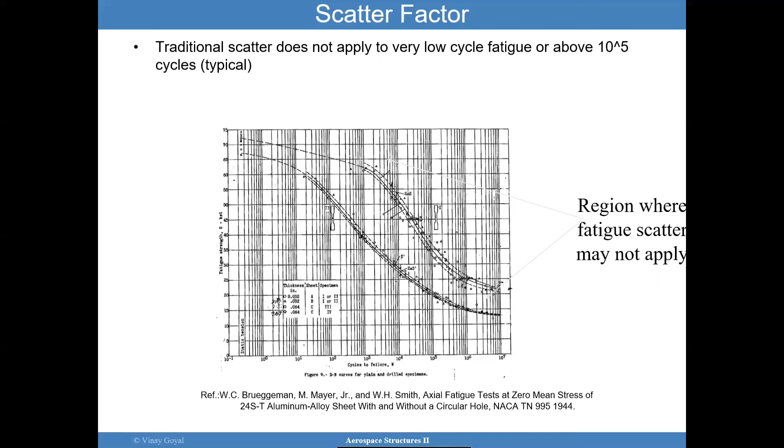The typical scatter factors do not really apply to very low cycle fatigue because the data is more tight. I'm going to go ahead and go here, to the scatter factors here.

Based on some aerospace standards, a scatter factor is applied to the service life. You can apply it directly to the cumulative damage index as one approach. A D of 1 is usually failure, and you can accept up to 0.25 damage. So if you can keep the cumulative damage less than 0.25, you're in better shape. For high cycle fatigue, as I discussed, a 10x factor is recommended. You can see that any error can have orders of magnitude difference, and that's why that will protect you right there.

Here's some pictures that I found from online sources. There's turbo machinery. You can see that stress concentrations can be obtained from closed-form solutions. We just covered that, and in the homework, you'll be doing plenty of that.

The alternate stress and mean stress can be determined from finite element models, and the finite element models should have sufficient fidelity to capture the response at fillet locations or geometric features that produce a stress concentration. The point I want to make is that stress concentrations do affect fatigue life quite significantly, so it's important that those are well characterized in your models.

So given a stress concentration, you want to look at calculating KT. KT is the peak divided by the average stress across this part, or sigma peak divided by S, the far field stress. That's your peaking factor or your stress concentration factor.

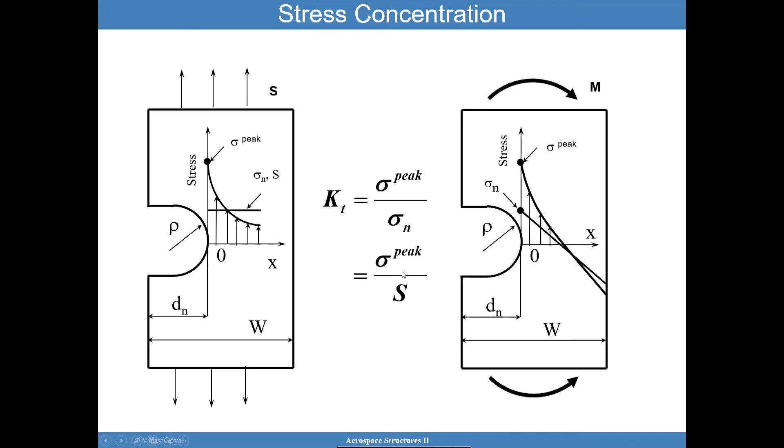And so you're going to obtain a stress concentration factor, and this is called the notch sensitivity. The idea is that a stress concentration factor is going to have a notch sensitivity, and we want to find out the fatigue stress concentration factor due to that notch. I think this becomes very important.

You can see here a notch radius is going to have different notch sensitivities. The bigger the notch radius, the more the notch sensitivity. So if you approach 1, then Kf becomes Kt, and that's what you get. But for very small notch radius, you start getting a Q closer to 0, which means Kf becomes 1. I'll explain that Kf is basically your fatigue stress concentration factor.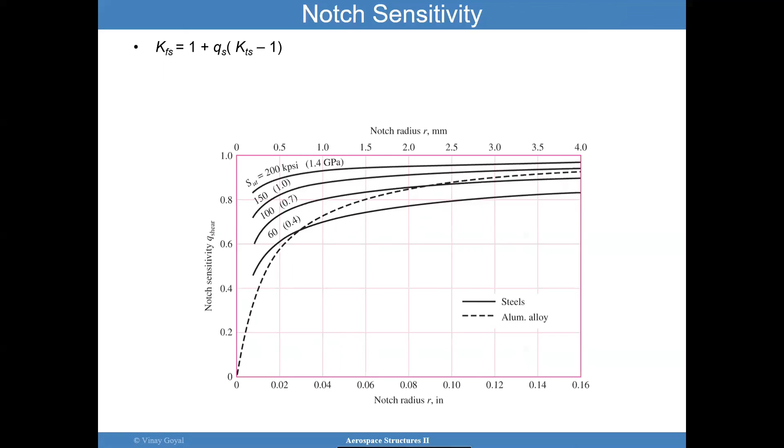For shear, you also have a very similar formula. These are the equations if you didn't want to use the curves, but we'll skip that. For most cast irons, Q equals 0.2 is a good value.

Kf, the way you use this, is a multiplier to increase the nominal stress. That's really what it is. So designers, instead of using Kt and increasing the nominal stress, use Kf and increase the nominal stress. Designers sometimes apply 1 over Kf as the Marin factor to reduce the strength instead. That's one approach. For infinite life, either method is fine, since this is equal to that. You can put the Kf above and get the same thing.

So for finite life, increasing stress is more conservative. Decreasing the endurance limit applies more to high cycle than low cycle fatigue. But it is important to consider, and this is the Collins method to derive this fatigue life curve. You basically want to knock it down by sigma ultimate divided by twice Kf. Here, the endurance limit for steel is sigma ultimate divided by 2, 0.5 times sigma ultimate, and then you further knock it down by Kf.

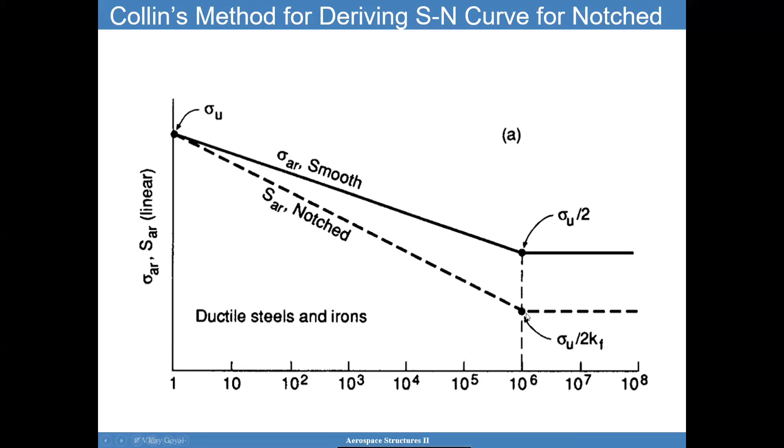Here's an example on how to deal with it. I'll welcome you to pause the video and not look at the solution, and then if you got it right, congratulations. Very simple problem: given a steel shaft in bending with an ultimate strength of 690 megapascals and a shoulder with a fillet radius of 3 millimeters, what we want to do is find the Kf for this problem.

Once you have that, you can calculate Kf, and that's 1.55. Then you can use equation 2 and get the same answer. Once you get that, you can take the nominal stress from your calculations, increase it by 1.55, and use that to get your fatigue SN curve.

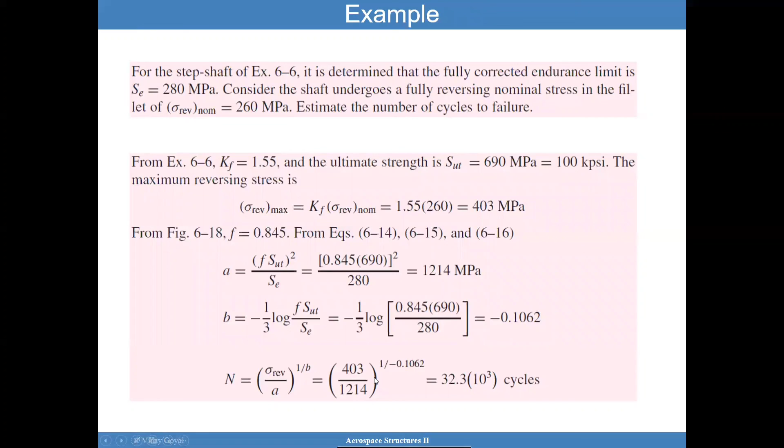We can look at another example of a rotating shaft, simply supported, with a non-rotating force of 6.8 kilonewtons. You can calculate the maximum moment due to this loading condition, and then just use the Marin factors for bending.

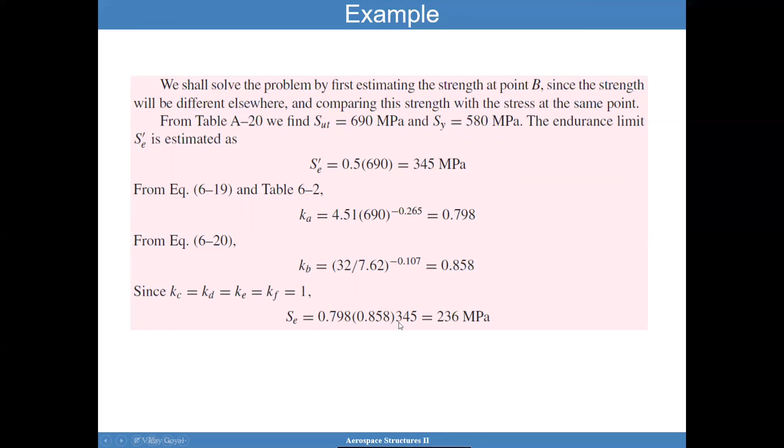In this case, Kc, Kd, Ke, and Kf are equal to 1, so no effects there. But you have that 0.5 that plays a role. The surface factor does play a role, and the size factor plays a role. Other than that, you've reduced the Se prime all the way to Se after applying the Marin factors.

When you have multiple combinations of loading, things get a little more complex, but a formula like that could work out. You can get sigma A prime, the alternating stress, and the mean stress using these formulas, which will include the fatigue stress concentration factors.

Here's yet another example of how to deal with it. I've shown this before, and you have to basically use the Rainflow cycle count to reduce the data. This is what is repeating, and what you want to do is determine failure.

So that's the example given here. Again, the ultimate strength here is 151. So f is usually 0.9, but here it's 0.795. S is 67.5, we found it, but that's not related to this example. That's a different example.

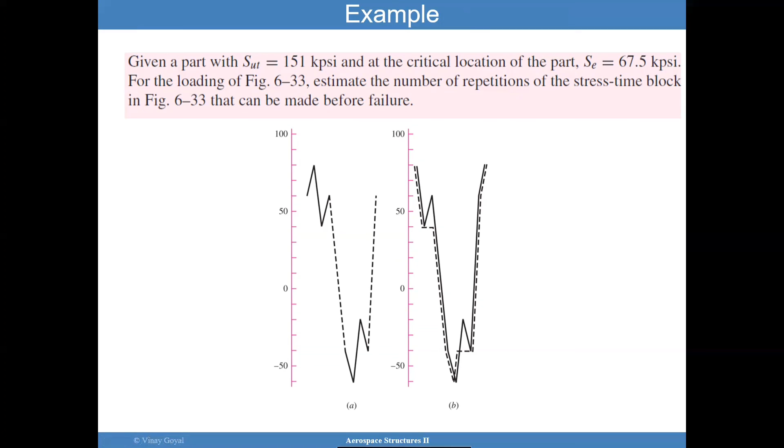Now you can calculate the fatigue, the number of cycles to failure based on that. Here, the Gerber fatigue criterion was used, but we won't be using that in this class. We'll be using the Goodman diagram the most.

I'll go ahead and skip these examples and go to low cycle fatigue. Low cycle fatigue occurs in situations where you have high plastic deformation.

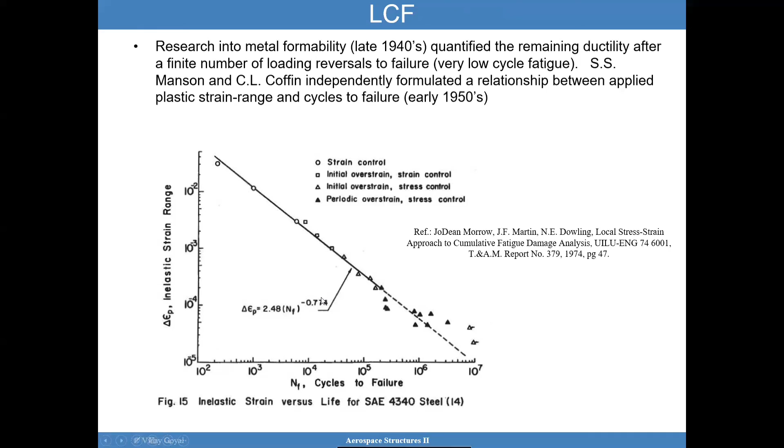So a strain life method is usually approached for this kind of problem, and you can use it. You can use Miner's rule as well, no problem. But it's important to understand that we typically use the strain life relationship when we expect low cycle fatigue.

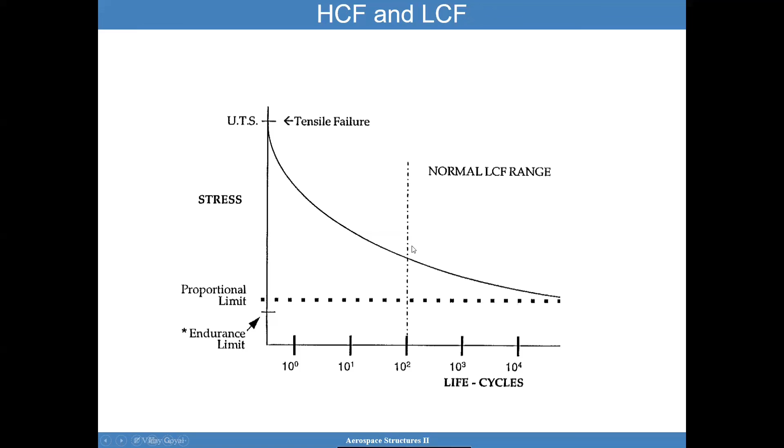Again, we're talking about the normal low cycle fatigue range, which will range between 100 cycles to somewhere in the range of 5,000 cycles. It depends when the knee starts occurring, as we had discussed. The low cycle fatigue characteristics is such that the cyclic behavior is more in the plastic range, much more significantly than high cycle fatigue. The stress strain cycles that cause low cycle fatigue cracking are produced by significant levels in loads. You see microscopic changes in the materials, dislocations, and then some quite plastic deformation occurring.

The low cycle fatigue tends to be highly statistical in nature too. You have a lot of scatter in the data. You get moderate deformation. You can get a fracture dependent behavior depending upon time and temperature. So low cycle fatigue does depend on that.

Thermomechanical fatigue becomes important when you have thermally induced stresses, and the fracture surfaces can also be affected by oxidation and alloy depletion.

And the strain hardening behavior is also found, and that becomes important when you're doing these calculations. Under cyclic loading, materials can actually harden, soften, be stable, or be mixed. For soft materials, the initial dislocation density is low. The plastic cyclic behavior increases the dislocation intensity or density.

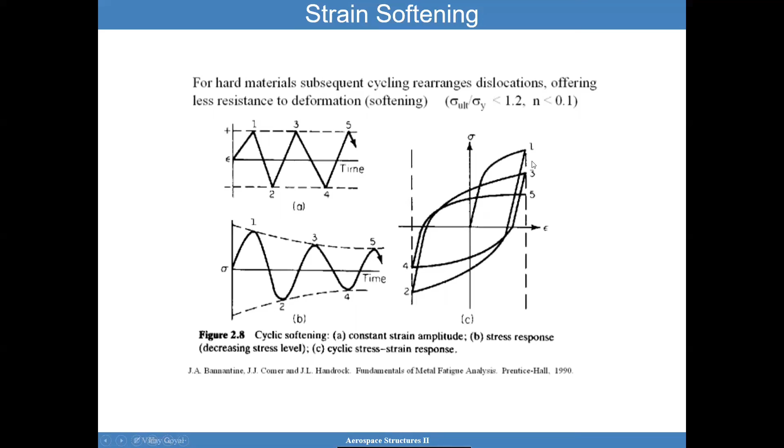The strain life method: basically, fatigue failure almost always occurs at a local discontinuity. When stress at a discontinuity exceeds the elastic limit, plastic strain will occur, like I discussed. The cyclic plastic strain can change the elastic limit, leading to fatigue.

So it's a true stress strain curve for the hysteresis. You want to do a modeling that accounts for at least 5 reversals to really understand that strain range that it should be included in strain life methods.

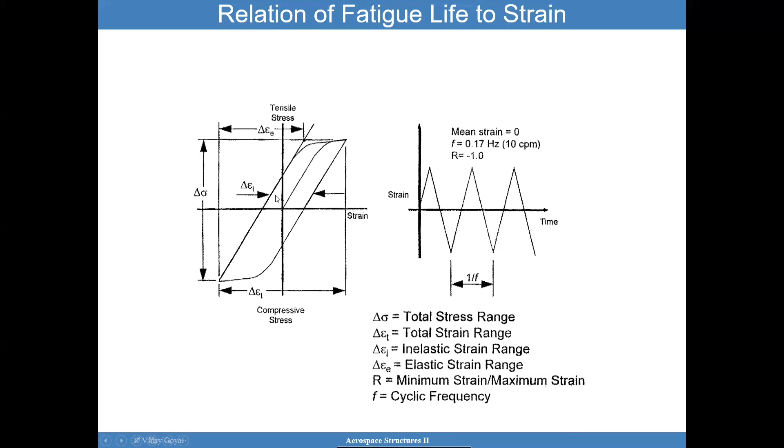There are different approaches. You have the total stress range, the total strain range, depending upon how the data comes to you. You have the plastic strain range and the elastic strain range. That data needs to be considered, depending upon what data you have, then you have to properly select it from your models.

The relation of fatigue life to strain: here you have an example of a strain amplitude given to you and reversals to failure given to you. So again, different data provided.

You also have the fatigue ductility exponent, which is the slope of the plastic strain line, and the fatigue strength exponent, which is the slope of the elastic strain line. So you have this exponent and then you have this exponent - this one is for the plastic portion, this is for the elastic portion. These two fatigue exponents really drive the behavior of the strain to failure calculations.

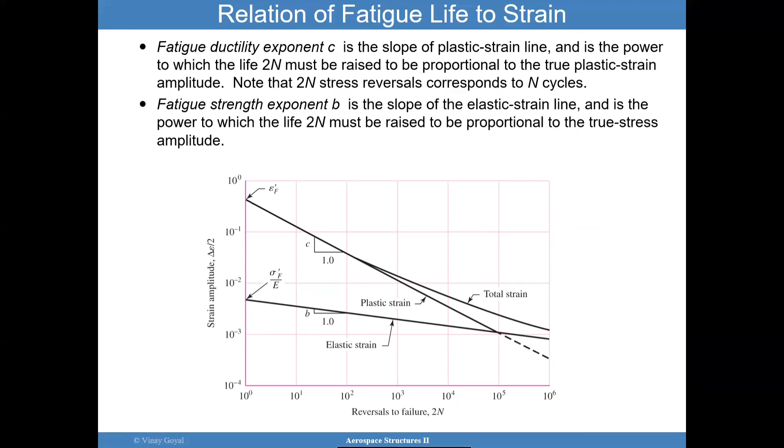So the total strain amplitude, if you're to do it in terms of total strain amplitude, the number of cycles to failure can be calculated using this formula. Here the total strain amplitude considers both the plastic and elastic, and b and c become the fatigue exponents, which are provided to you.

But I'll go to the bottom line here. The Manson-Coffin equation is a great equation to use. People use this all the time. You can correct it for mean stress using this equation here. The mean stress goes here, the ultimate stress goes here, and then this formula tends to do very well for mean stress calculations.